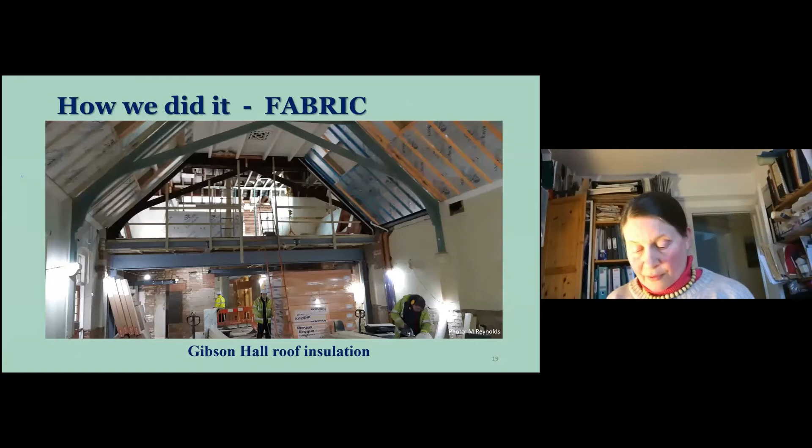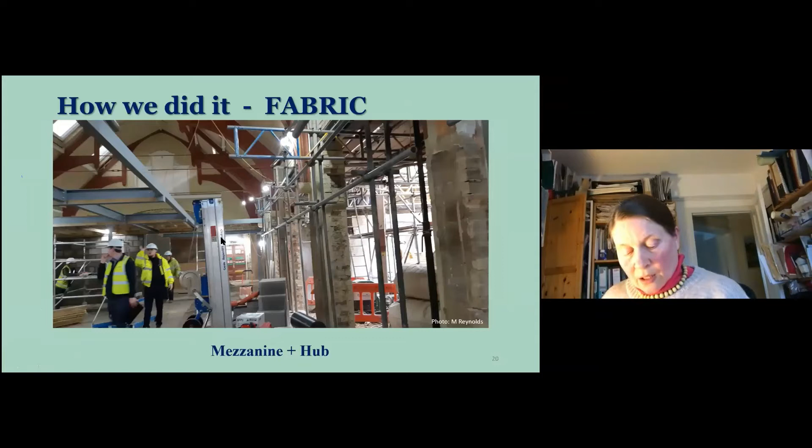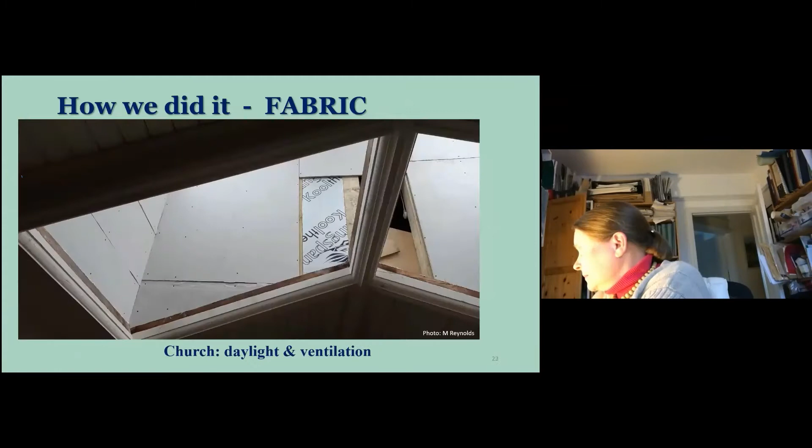So, how did we do it? Fabric insulation was first on my list. So here is the Gibson Hall roof being completely rebuilt. Insulation, roof light framing. Here's the hub. This is the steel mezzanine. Those arches, the trusses that you could see, and then the link corridor, and half of the hall space has been made into the hub area.

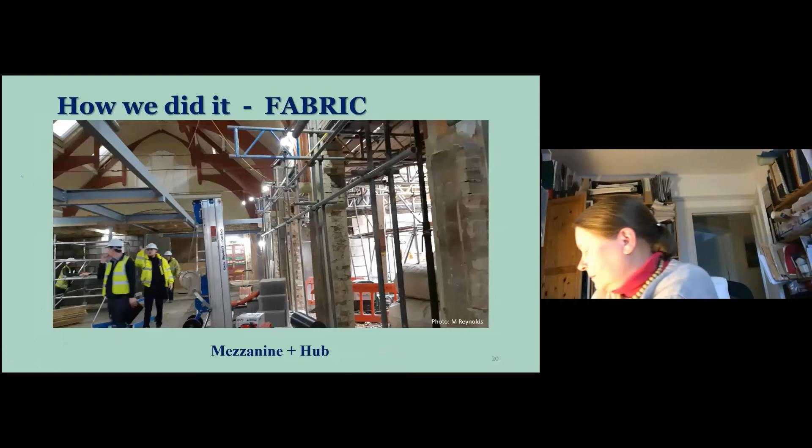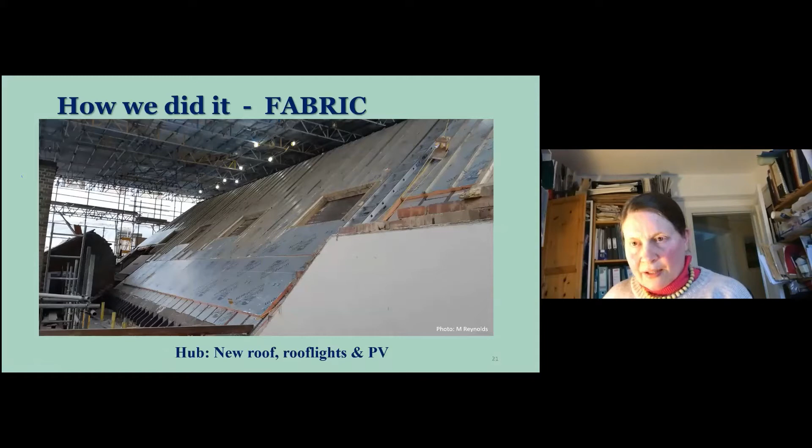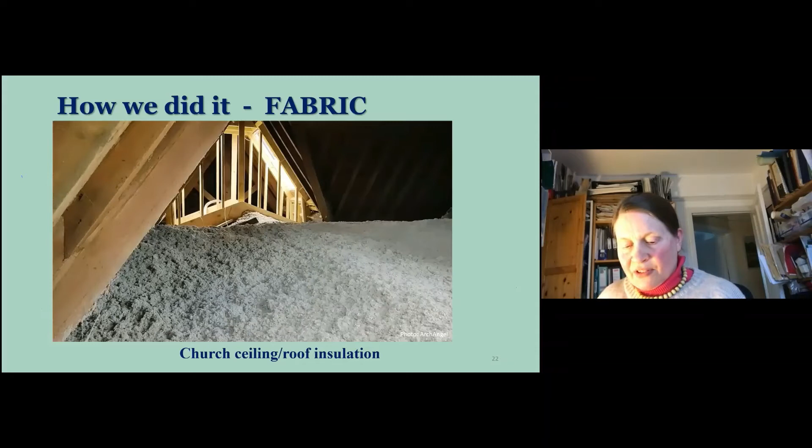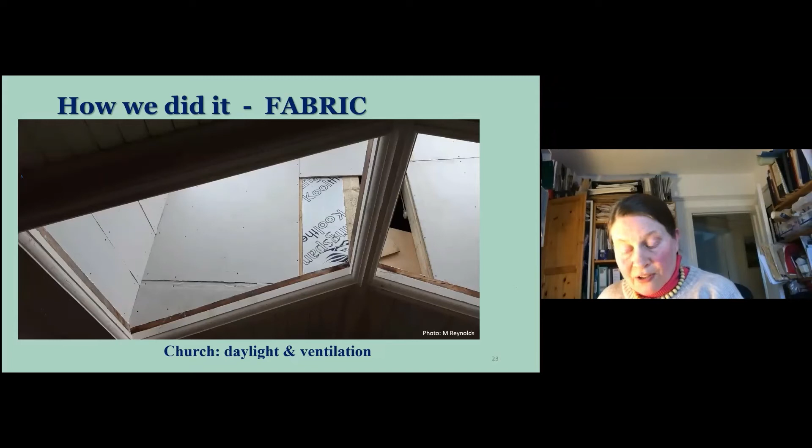Over the hub, the roof was completely rebuilt. And high performance roof lights and solar photovoltaic panels were added to the top. The church ceiling, this roof that they had put back without any insulation, we added Warmcel insulation, which is recycled newspaper. A foot of it was blown in above the ceiling. High performance roof lights were built in for daylight and ventilation. They can be operated remotely to let out the heat in a crowd or on a hot summer day.

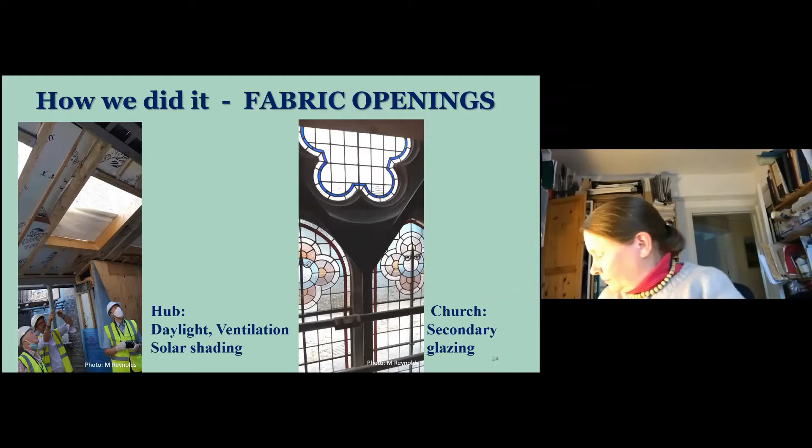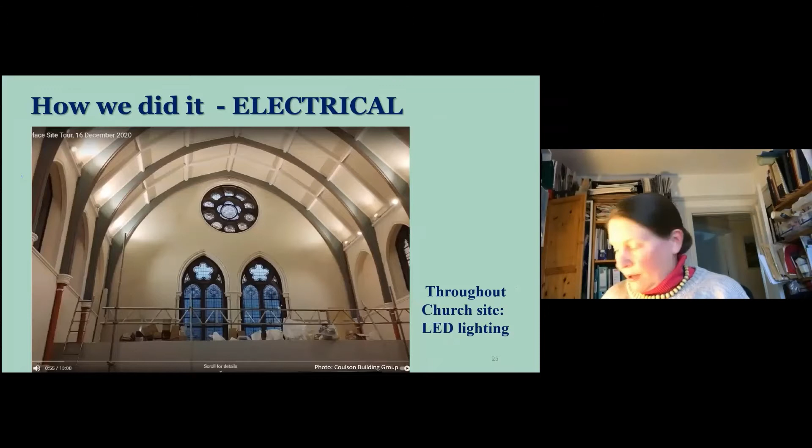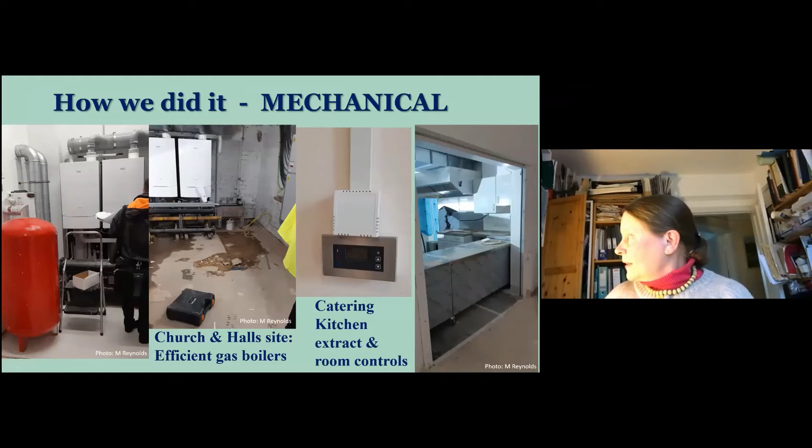In terms of electrical, the entire site was rewired with LED lights throughout. Mechanical, we installed efficient gas boilers, 2 in the church here and 2 in the basement under the hall. Various types of ventilation, including for the catering kitchen here on the right, and each has a very easy to use, user-friendly control.

In terms of energy, we have 16 photovoltaic panels. You can see those. We're outside now in the garden looking back at the hub area. 16 panels up there, which is approximately 5 kilowatt peak of generating power. We have allowed space and the wiring for a battery. It is to be seen whether that's the best course.

Our electricity suppliers are Scottish Power, which is 100% renewable. We haven't yet negotiated our gas suppliers because there was a billing issue, so we've kept the old ones on until that's sorted out. And then we are hoping to find 100% renewable gas, which is expensive, and there's not a great deal of it, but we wanted to invest in further development of sustainable gas.

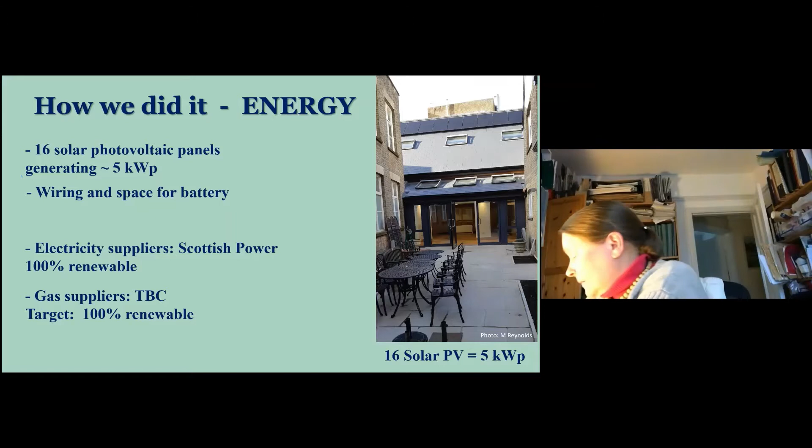The most important and the most gratifying part of this whole campaign was hearts and minds. I'm just so pleased, I can't tell you. The contractors, these are the church team, don't forget, they'd never seen PVs before. And by the end, the young site estimator said, we are going to go in and now qualify to do PAS 2035 retrofits. Which is quite a business. I was really pleased about that.

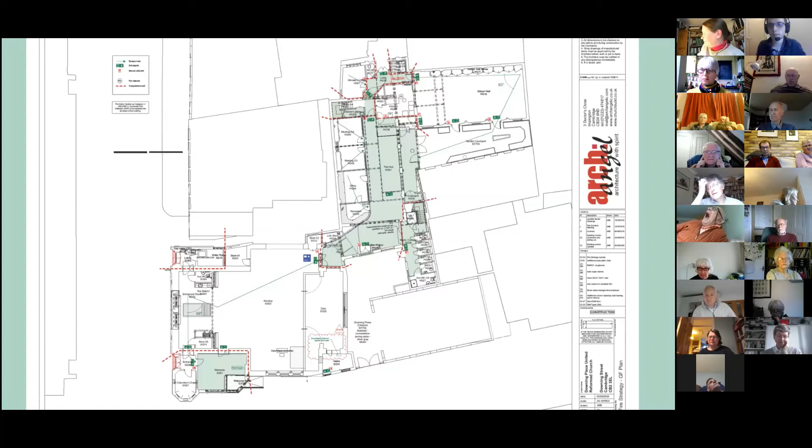So I think we've got plenty of time to explore things now. One of Margaret's prompts there is, what's our situation? Are there any things around our meeting houses? We've got lots of different meeting houses that are at different points, but are there particular differences or challenges or similarities? But also any other questions for Margaret are most welcome.